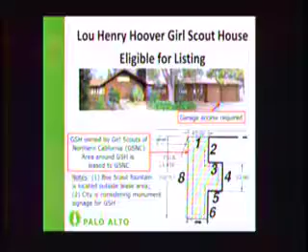The Lucie Stern Center is a Category 1 resource. Many buildings are included in that. We're interested in having the Girl Scout house become one of the listed items; it is not currently. There's interest in moving a bird bath from the Girl Scout house over to where the Boy Scouts are located. The Lou Henry Hoover House was mentioned in the last meeting. Since then, a study was done, the Rinconada Park Long Range Plan Historic Resource Evaluation, which determined that this Girl Scout house is eligible for listing as a historic resource. Here are some other images of the area behind the Girl Scout house and the parking area behind the Stern Theater and scene shop.

Back in January, the ARB and HRB reviewed some concept plans in study sessions. Those plans were then changed, and the ARB looked at that version and provided some support for that approach. The applicant will summarize what you said back in March in their presentation. The revised plans were shown to the HRB, then there were slight revisions since then that the applicant will provide. The HRB on June 22nd requested that an HRB subcommittee review the roof colors to look at compatibility; they were very pleased with the switch to gable roofs, just had a question about the color and asked for alternatives to come to an HRB subcommittee. The initial study is being finalized this week and will be available Friday, circulated to the HRB and ARB for comments.

Today we're going to be asking you to continue this item either to a date certain or a date uncertain, so that the CEQA document can run its course for public comments, and we'll be back before you with findings and conditions set for approval. And when I say approval, it's recommendation to the City Council.

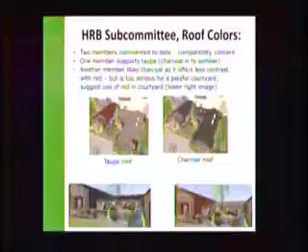Let me quickly review the goals of the project, which are to right-size the building for our current programs and audience, to seek accreditation with the American Alliance of Museums and the Association of Zoos and Aquariums, as well as tailor the spaces to better suit visitors and make it safe for kids to interact with animals.

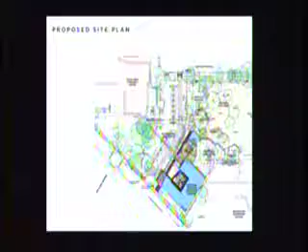This is the site plan. Little to nothing has changed with the horseshoe-shaped building around the Dawn Redwood Courtyard. What we talked about a lot last time was this strong pedestrian promenade that links you into the park and establishes connecting points, thinking about the context, thinking about this as a civic project and having much stronger presence both within its surrounding neighbors and public use.

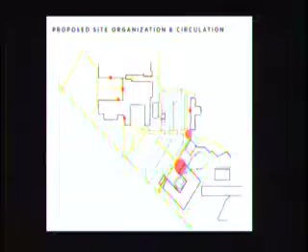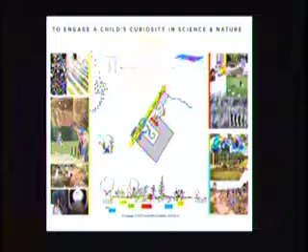We spent a lot of time with you talking about this exterior experience along the way and how do we engage a child's curiosity as we move through these spaces. If you recall, we talked about the experience starting before Middlefield, or starting in the park itself, as you get drawn and pulled into the museum with experiences open to the public outside the building, along the promenade. These included things of scale, areas where kids can play, establishing a watershed, illustrating wind in a creative way, and playing with light and the elements.

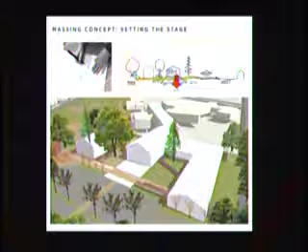And the massing model that we showed you at that study session was, in essence, this image you see before you now. So we've maintained this form and this overall concept, but lots has developed since then.

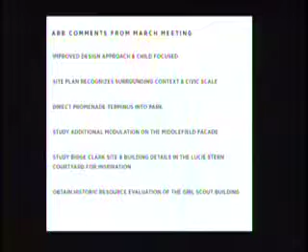The comments we had heard at the meeting—there was a lot of positive feedback, which was terrific, on the focus of the site, the scale, and the civic context. Comments we had noted were: can we rethink the promenade and how it intersects and connects with the Girl Scout building, and how it turns to go into the park, and can we shove something back 20 feet, or magically figure out a way to do that? That was one comment we had noted.

There was also a comment from Board Member Baltay about modulation, really trying to think about that elevation along Middlefield. I think all the elevations we'd brought forward before were more of a clean, modern, lengthy aesthetic, and there was encouragement to explore—this is a residential neighborhood—can we break the scale down in different ways, and how can we animate that facade?

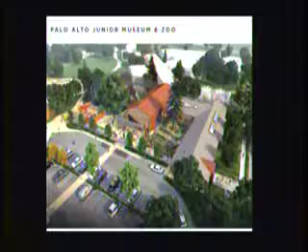Another comment was really kind of you all wanting to see more detail and sense of scale, looking at some finer-grained elements that we didn't have with this model. So to walk you around the building, this is an overall rendering of where we are to date. I think the best way is to walk around the site, maybe start from the Middlefield approach and talk about the building, not just elevation by elevation and massing, but really how you would experience the facility.

This perspective is along Middlefield Road. The program inside this wing consists of classrooms, zoo exhibit, museum archives and storage back over here, and then office space as well. And this is the elevation.

And then this is the entry portal. Before, we just had this open slot, and what we wanted to do is punctuate that and make it fun and whimsical. We're actually working towards designing a rainbow kaleidoscope tunnel, so that as you pass through, you go from light to dark, with lights of all different colors coming in from different skylights.

We've looked to break this down to have more solid here, a punctuated window that could have some display, and then classroom and office windows that are modulated back in here. You can see more of this in the elevation.

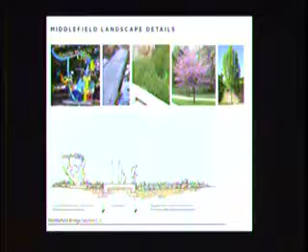As you enter, one of the other things we're looking to do is think about thresholds and that experience. So as you leave the sidewalk, we're exploring ways to have this read as a bridge, with a little bit of a watershed in and around with plants, so that as you enter the kaleidoscope tunnel, you'd be walking along this bridge element to enter the building.

We're looking to facet the inside of this space, neck the ceiling down, pull the walls in. We're looking to do this economically, and we'll probably do some mock-ups to make sure we get the effect we're looking for — in essence, solar tubes with either prisms or dichroic film within them to get that effect. So this is a plan section, and this is an elevation section through that space.

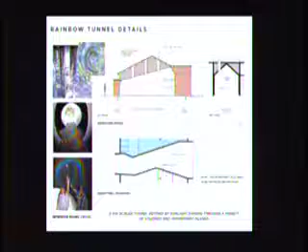As you emerge through the tunnel, you're then on the walkway into this Dawn Redwood Courtyard, and there are two different zones we're having to address: one is a space that the users want contained and fenced in, and then there's an area open to the public, which is the promenade along this edge.

So this is where we enter the watershed and a bridged sidewalk with depressions and raised areas of plantings, and then we have a reed fence you can see in this elevation. We're looking to playfully separate and design fencing that isolates the public area from the paid experience.

Back over here is a series of walkways around the building of natural materials, and then some planter areas where, as part of the exhibit design, they'll look to bring in exciting and unique plants, themed as a Jurassic garden, so it becomes an educational opportunity to leverage outdoor space within this courtyard.

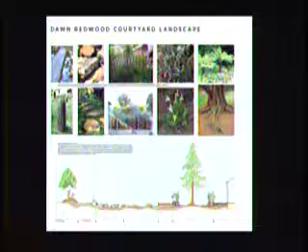As you might recall, every square inch is precious because we're very budget constrained. Finishes in and around here — I'll talk about finishes in a minute, we can come back to the renderings. And then here's another section through that space looking at some of the planting.

And then the view overall from the parking is this entry piece in through here. So here's the courtyard — we've quieted it down, there's the entrance tunnel as you walk along this edge, but the buildings read somewhat quiet so that the entrance is really played up and focused.

And what we've done is taken the end gable concept and thought of doing it economically. We're basically using an almost barn-like or butler building kind of concept in construction, and then using some natural materials as far as the wood and the metal, and then it almost becomes this extrusion as it comes out, so that you don't have this hard, sharp face.

We're creating this courtyard that's partially enclosed with trellis, and then this artist windscreen that will be part of our artist-in-residence program for this project is to design this wind sculpture that will actually become part of the facade of the building. So we're trying to get as much into the space as possible.

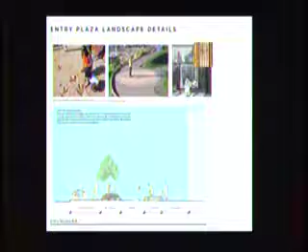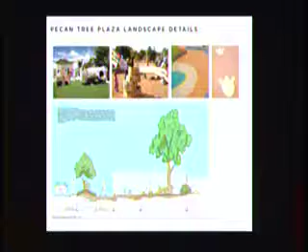Here's some sample images of what sections through that area would look like. And then as you move down the way and around the pecan tree, there will be some outdoor play areas and whatnot. Here's a section through the portico that I was just describing, and some representative images of sort of the aesthetic that we're looking for.

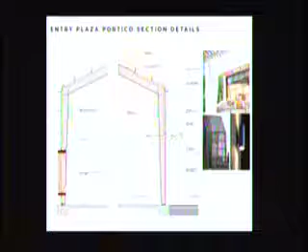And it is these sort of bent steel with these Z-girts that then extrude out, uplighting and downlighting, and then some little punctuated window view spots onto either side here, as well as a little trellis piece over there. So this is a section through that portico that's out at the front of the street, or at the main entrance before you enter the building.

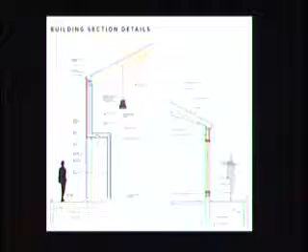And then a sample wall section through the building here. We're looking to get some thickness and some heft as you kind of express that main form, the dominant form of the museum itself, but clean, taut eaves and detailing and whatnot.

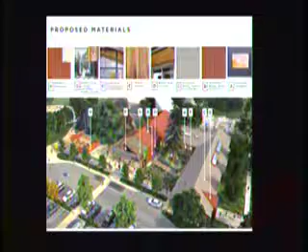So to talk more about that, this kind of represents the finishes. We're using a combination - we've got a sample board we'll hand out - of wood siding and then standing seam roof. The whole building would be roofed with standing seam, and then to differentiate it a little bit, we were looking to have this playfulness where the museum, the main museum piece, which is a story and a half, would then have that finish wrapped down.

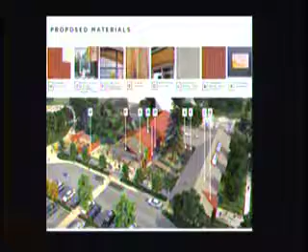There'd be those deep recesses over here that I was just talking about. Out in the trellis area, there's this punctuated view window that looks out into the watershed zone with the windscreen above, so that we're trying to have this processional effect as you move, drawing you in and then simultaneously pulling you out.

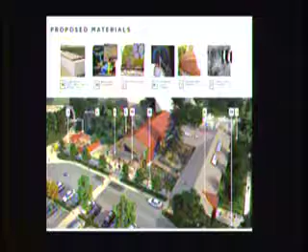Site finishes echo some of the same materials, a combination of concrete and wood finishes to soften the space. We talked about the zoo netting before. And then as you move into the park, those boundaries would consist of integral colored stucco plaster walls and wood fencing. We've done that for economical reasons, but having those sort of nest in and around each other.

Let's go to the next slide. There we go. So this is a rendering kind of illustrating some of that.

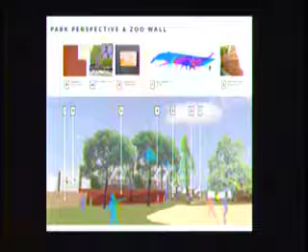So as you're in the park area, this is a kid flying a kite - that's not part of the building. We're looking at having that rust red colored plaster wall here, and then wood fencing that kind of nests in and wraps in and around.

And then in some key moments, like along this one section here, we're looking at having some graphics on the fencing to illustrate a sense of scale and patterning and whatnot, to suggest that this is a children's museum and there are exciting things happening within here.

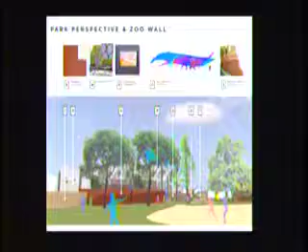And then just a couple of footnotes. We talked, I think, at the last meeting about this sort of phase 2 portion of the site. The phase 2 of this 2-story building is not part of the review. The client has made a decision to defer that at this time, so it's more of just one fine day and not part of the application at this point.

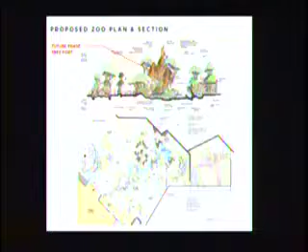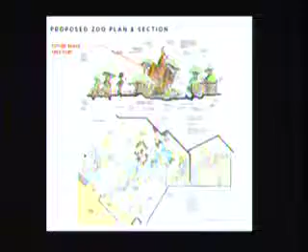The zoo - we haven't changed anything at this point with what's inside, other than that there's the netting with the columns that spring off of the walls themselves. And then imagery of the phase 2 building that I just mentioned, and that's it.

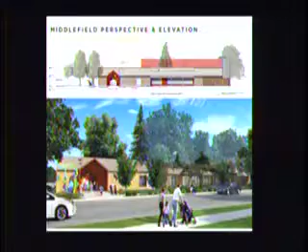Which section? This one, the top one you've got there, that very long uniform roof line. I'm saying the section in the middle where the windows are the darker red color. Possibly kick that section up a couple of feet or something, just to break up that very long elevation. So the cost issue is not that tremendous a difference.

As to this whole difference of opinion as far as color, I personally prefer the taupe color. I think it works better than the charcoal, and I think you ought to stay with that. I do like the entry.

I've been involved with a couple of projects over the years that deal with kids. I'd love to see that entry, which I know nowadays in our code-infested design process wouldn't allow it, but I would love to see that entry drop down to about 5'6", where the parent has to duck down, which means it becomes sort of the haven of the children, and the parents have to work at it to get in.

But we both know that the building official would laugh at that. But anyway, be that as it may, I like that whole entry concept, the whole idea that this is for the kids, not for the parents.

As far as the bridge, I could see it. It would have been nice, and maybe, it's the kind of thing that sometime in the future you get some generous donor that you could turn it into the whatever ABC bridge that they donated or whatever.

All in all, I think it's a big improvement, and I could vote for it like this with just a few minor modifications.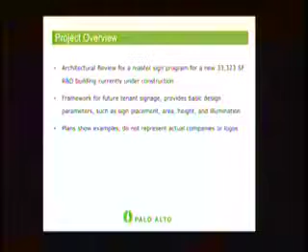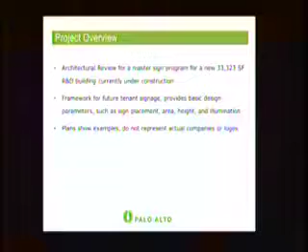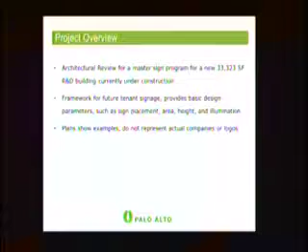But the applicant and the developer expressed interest in providing future tenants with a framework document that has basic design parameters. The benefit of master sign programs is that once the master sign program has been approved, no further architectural review is required as long as signage is consistent with it. So the plans before you today do show logos and companies, but those are just examples, as no tenants have been selected at this time.

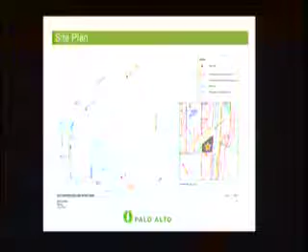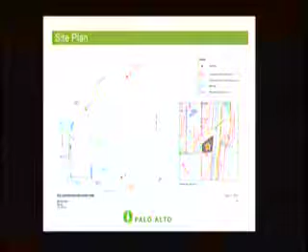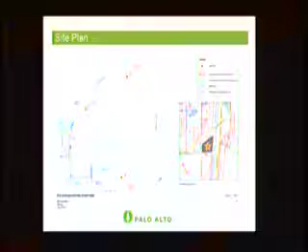This is a site plan showing the build out of the 2747 Park Boulevard project. The building is located at the apex, right at the corner of Park Boulevard and Sheridan Avenue in the Ventura neighborhood. There are 10 total signs requested with this application. 2 are freestanding tenant monument signs located at the vehicle entrances, 9 feet in total height and 54 square feet.

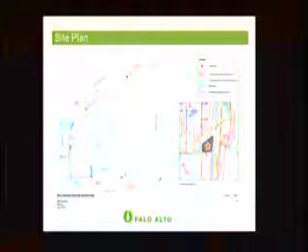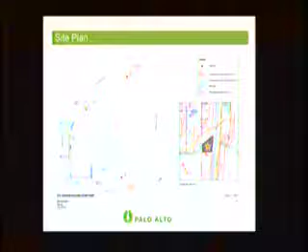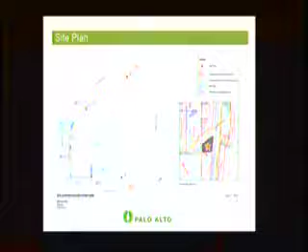There are 2 freestanding monument signs located at the building entrances, right at the apex, and also facing the parking lot. 3 wall signs: one at the pedestrian level directly facing Park Boulevard, and 2 located closer to the parapets at the top—one facing the apex at the corner, and one facing the Caltrain right-of-way. There would also be two address signs showing the 2747 numbers.

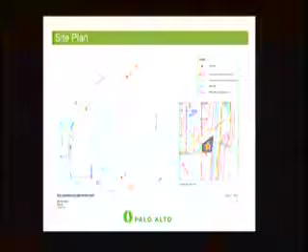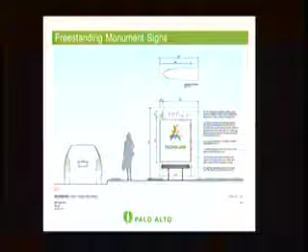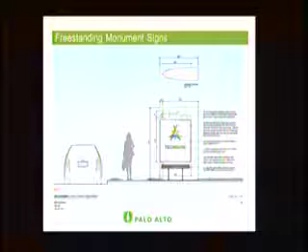This is an example of the freestanding monument signs located at the vehicle entrances—9 feet in total height, 54 square feet in total sign area. These signs would be made out of aluminum as well as a clear plastic material on the cabinet. The signs would be externally illuminated, with illumination from below shining onto the sign. This is another example showing a different cabinet which shows 3 tenants instead of just 1.

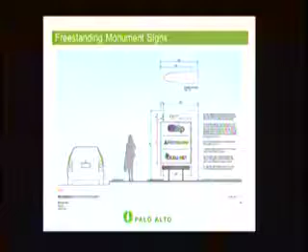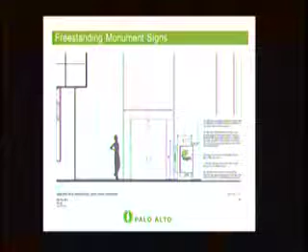This is an example of the type of sign which would be proposed at the building entrances, slightly smaller, 5 feet in total height, with a smaller sign area. The 2 signs proposed at the building entrances are not proposed to be illuminated.

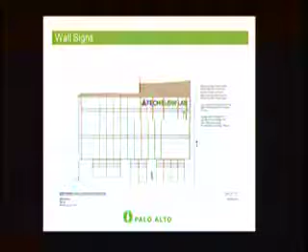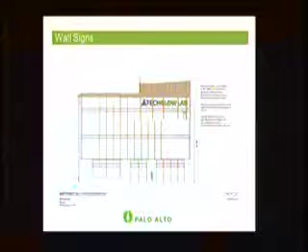This is an example of the wall signs, which I call skyline signs, located near the parapets of the building. This is proposed in 2 locations, and this example is slightly different from the iteration shown in the earlier plans provided in the packet. It shows a total sign area of 120 square feet, and 2.5 feet in total height for the letters, which is what's requested with this application.

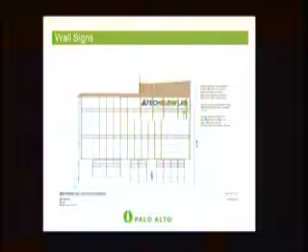These 2 signs, mounted at the top of the building, would be channel lit, meaning internally illuminated signs.

Staff is recommending approval of this application at this time. We'd want to highlight two significant conditions of approval. The freestanding monument signs are 9 feet in total height as proposed. We felt that along the Park Boulevard corridor, you don't actually see that many monument signs to begin with, so a 9-foot high sign might be inappropriate for the neighborhood.

We're requesting through the conditions of approval that the total height be lowered to 6 feet. The other condition is to ensure the wall signs are compatible with the area—reiterating that the letters for the wall signs be no more than 2.5 feet in total height, which is consistent with what's in the plans. I believe the applicant has a presentation as well, but I'm happy to answer any questions.

Great, thank you, Graham. Okay, let's do the applicant presentation, and I think you have 5 minutes.

How does this turn on? Is this on? Is this on? Yeah, it seems to be on. Should be. That's good. All right, thanks, Graham.

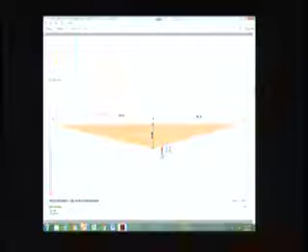We've kept the required setbacks. One consideration is that making the sign a lot shorter would mean the footprint would expand considerably instead. We're also trying to keep the sign out of the sight lines for the vision triangle, maintaining a safe viewing distance for people turning in and out of the parking lot.

This is the sign that staff is suggesting we reduce in size. One of our concerns is that reducing it by 3 feet down to 6 feet total represents a 30% reduction. These are all make-believe companies—we made up these logos ourselves.

For example, the Tech Glow logo is only presently 5 inches tall, and the smaller the sign becomes, the smaller the font has to become. Ideally, what we're trying to achieve is a clear area that allows these logos to not be smashed on top of each other, so if the building leases one tenant per floor, they all have enough clear space that it doesn't look junky out there.

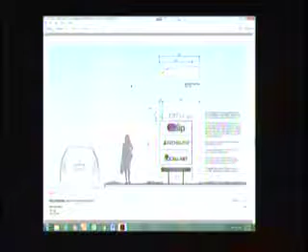The goal is for the font of the logo to be large enough, for the logos to not be on top of each other, and for each of the 3 tenants to have clear space and the opportunity to be identified on the street. That's the goal, and how we arrived at where we are. Also, the sign itself matches the same coloration and materiality as the building.

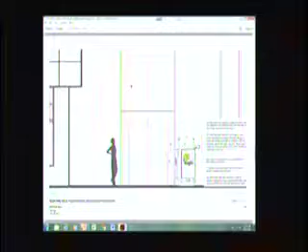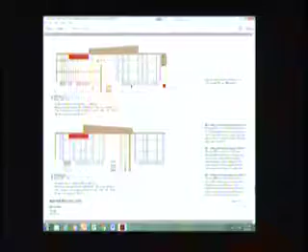And then also the one at the door here, we're planning to co-locate the card reader in it to kind of clarify the elevation as you enter the building. Those are really the only things I wanted to add to Graham's presentation. So if you guys have any questions, we'll be happy to answer.